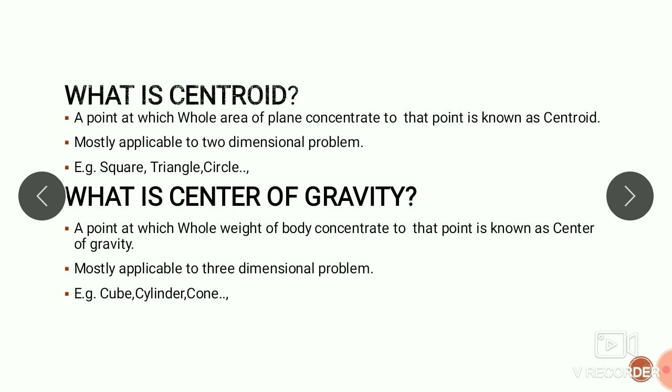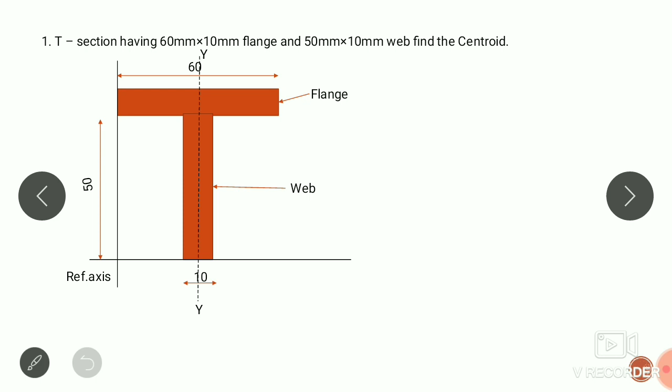So I am solving one example for better understanding of how to find the centroid of a given object. Here one lamina will be there: a T section having a 60 mm into 10 mm flange and 50 mm into 10 mm web. Find the centroid. Finding the centroid of any given lamina is divided into 5 steps.

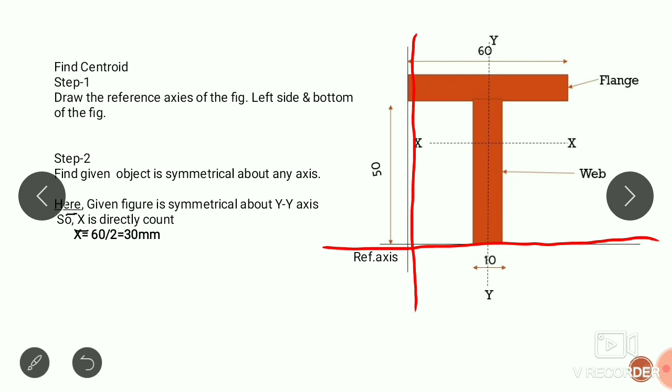Step 1. Draw the reference axis in the figure: the leftmost line and the bottommost line. It is the reference axis. Now step 2. Find whether the given lamina is symmetric about any axis. But what is axis of symmetry? It is defined as an axis dividing the object into two similar parts.

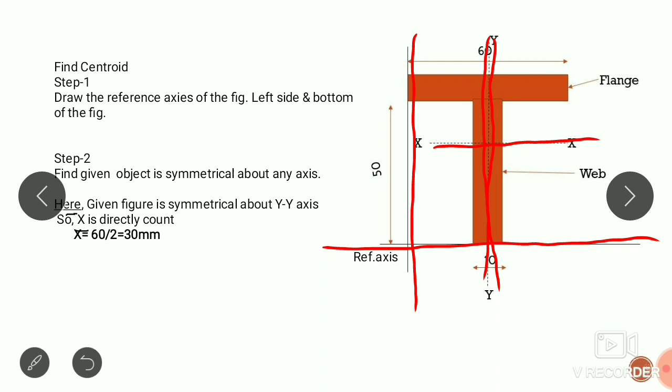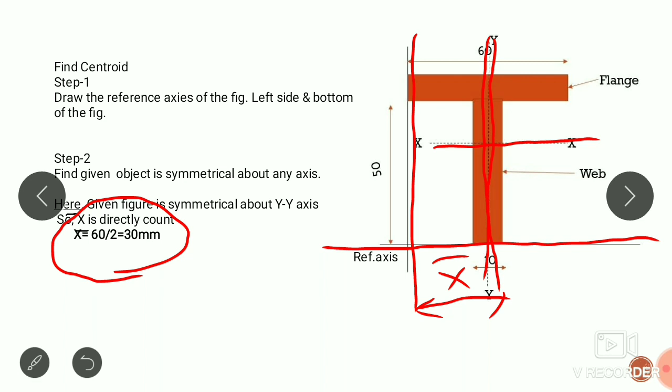Step 2. Here the given figure is symmetric about the y axis, so x bar is directly counted. Therefore x bar is equal to 60 by 2, equal to 30 mm. Now step 3. Divide the object into different parts. Here the given object is divided into two rectangular parts.

Step 4. Find the area of the different parts. Also find the x and y components. Now here part 1 and part 2. Part 1 is 60 into 10 mm and part 2 is 50 into 10 mm. Now area of part 1 is b into d, equal to 60 into 10, equal to 600 mm square. Area of part 2 is b into d, equal to 10 into 50, equal to 500 mm square.

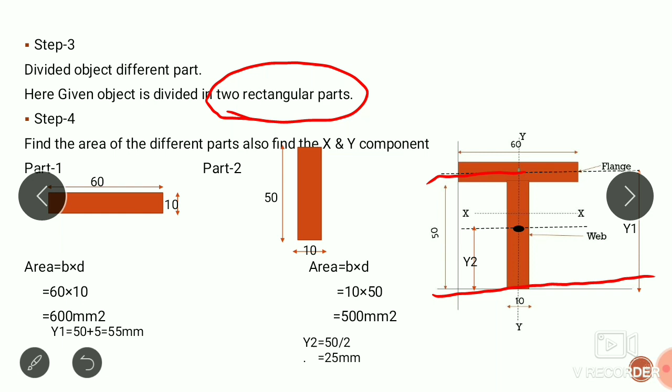Now find y1 and y2. How to find y1? It is the vertical distance from the horizontal reference line to the midpoint of the first part. Therefore, y1 is equal to 50 plus 5, equal to 55 mm. Similarly, y2 is the vertical distance from the horizontal reference line to the midpoint of the second part. Therefore, y2 is equal to 50 by 2, equal to 25 mm.

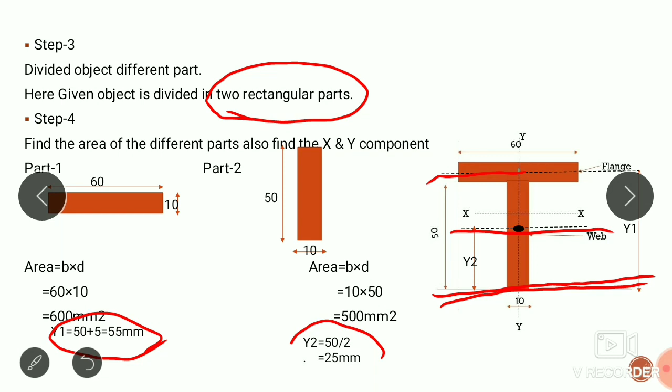Final step, find x bar and y bar from the equations. x bar is equal to a1 x1 plus a2 x2 divided by a1 plus a2, and y bar is equal to a1 y1 plus a2 y2 divided by a1 plus a2. Here we only find y bar because our lamina is symmetric about the y axis. Therefore, x bar is 30 mm, so only find y bar.

Therefore, y bar is equal to a1 y1 plus a2 y2 divided by a1 plus a2, equal to 600 into 55 plus 500 into 25 divided by 600 plus 500, equal to 41.36 mm.